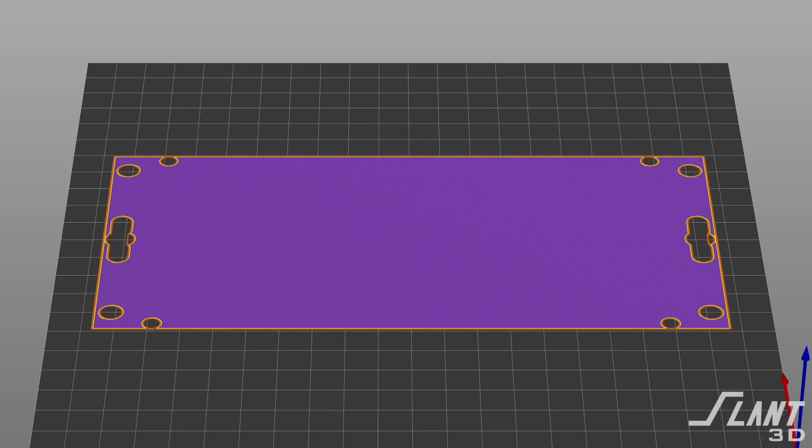Now, very often, those two most common orientations are the way that everybody does it, because if you have a large format machine, you can print it down flat like this, and this creates a good, rigid, reliable part where the layer lines are all horizontal all the way through the piece, and it's solid and it's reliable and it sticks down well to the bed, and that's fine. But if you have a smaller print bed, you might want to print it vertically.

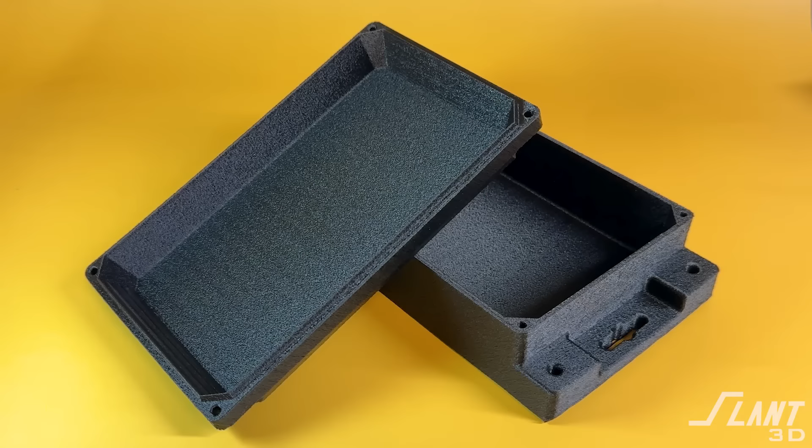But in this case, what you run into when you design a part like this is you end up having support underneath here and support inside of the piece, and that just turns into a lot of post-processing that can really jack with the cost of the part, especially if you are intending to mass produce it, which is what we do around here. So how do you actually design an electrical enclosure like this to not be printed in either one of those directions?

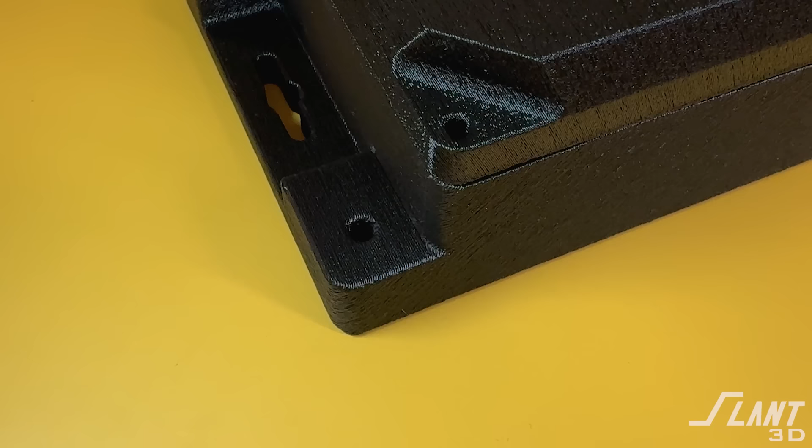Let's just go through the basics of the design of the enclosure itself. First of all, you're using 3D printing, so you can make chunky parts of the part. You can make these flanges on the outer edge really thick so that you can have a good solid screw point to the piece. You can still have all the same features as another enclosure. This part was actually inspired by an existing enclosure that needed to be replicated.

But in order to make sure that you have the same length fasteners, you can make the thinner areas just as you normally would so that you can use the same mounting fasteners that someone had intended originally with the project. From there, you can have thick walls that can either be 2 millimeters kind of minimum up to 5 or 10 millimeters. Again, you don't have to deal with the shrinkage of traditional plastics manufacturing. And since you're not going to be wasting all the material from having to machine something like this, it's just easier. You can get any geometry that you want.

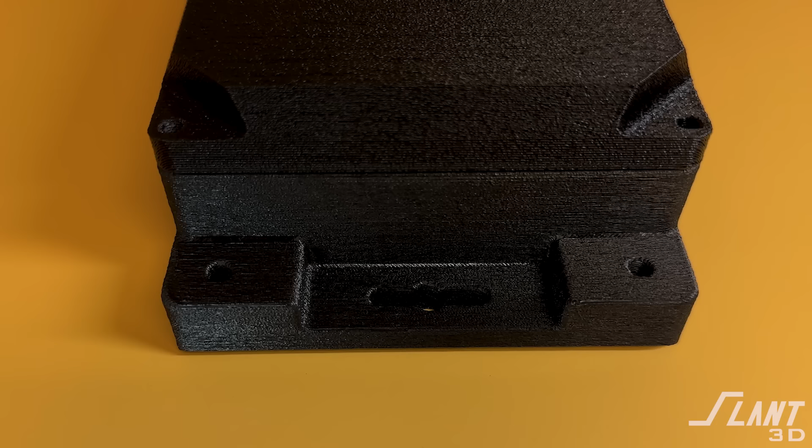And by allowing those thicker features, you're able to create an interface ridge on the top of the part that a lid can interface with. So when you end up with the lid like this, you have this nice thick outer edge that you can then put a lip on the interior of in order to make this mount onto the box more reliably.

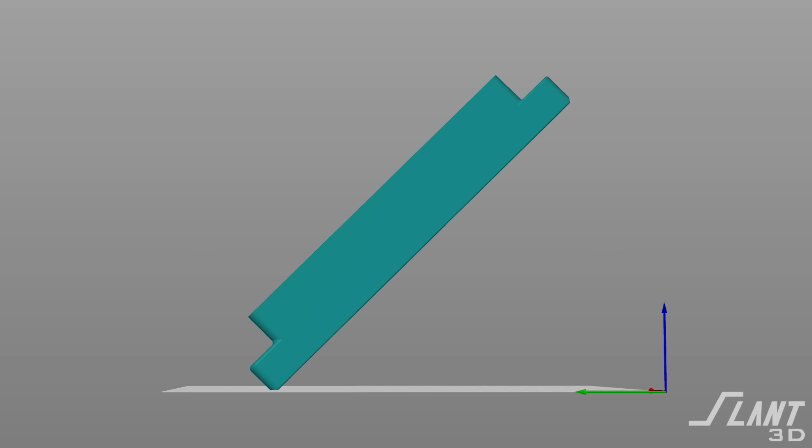But let's go ahead and look at the other way of printing this, because this actually is best done inside of CAD. What you want to do when you're printing a part like this is not actually print it flat or vertical. You want to print it diagonally. Now, this is not very common or very easy to do, because if you print it like this, now the center of mass is not over the center of the touch point on the print bed. So you're going to have the part fall over.

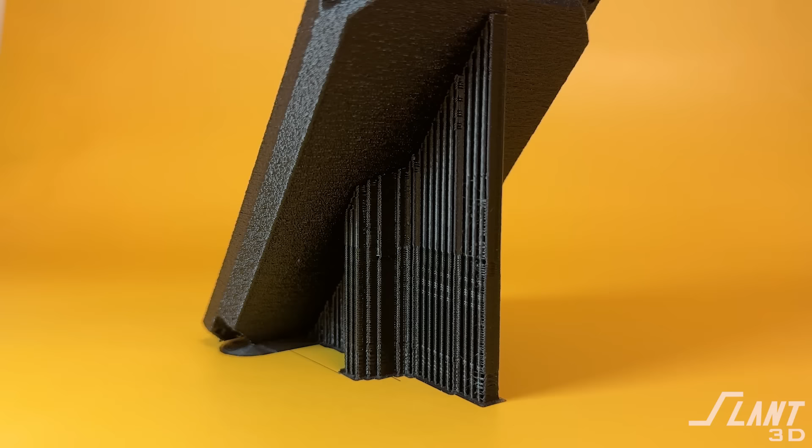So you have to have support back here. But you don't want to have that be auto-generated support because it's just nasty and it ends up creating a lot more material and not always being very reliable. If you're using traditional auto-generated support, it will have a little bit of distance from the part to be removable, so you would end up with flex and wobble as the part is printed. So you have to use designed support. And the way you design this support is just like this.

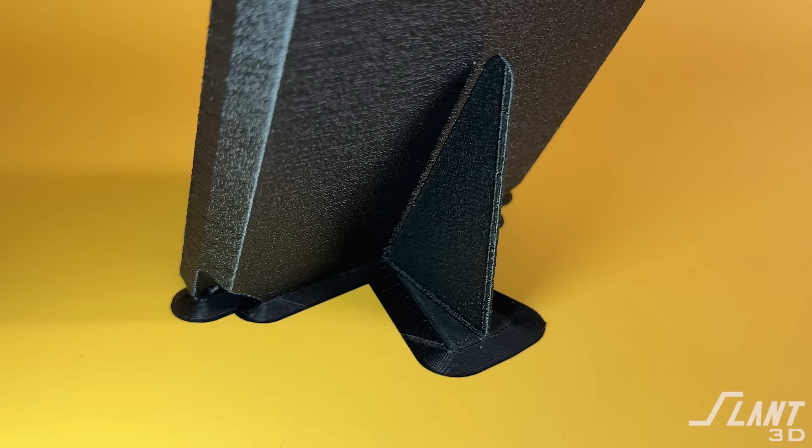You create effectively a fin off the part. You can do it at a 45-degree angle because 45 degrees is the best way to print the part. That way you don't have overhangs that can potentially sag by having a steep area over here, even though it's shallow in the back. From there, you design this fin to be about 0.5 millimeter to 1 millimeter spaced parallel to the back of the enclosure or the part that you're trying to print.

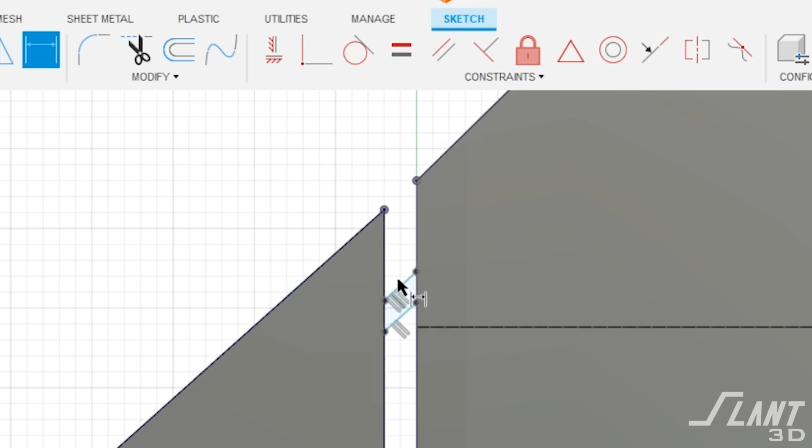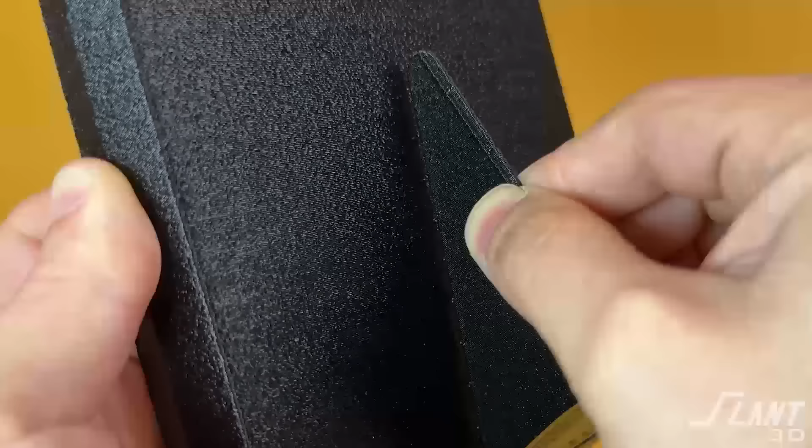Then you take sprues and horizontally design them to run and merge into the part. You now have this nice little set of ribs that run up here along this fin, and you have this awesome piece of support, which when it's done, all you have to do is break it off and it comes clean, and all you have is a few divots that could be sanded down or you can just live with. It's a very clean way of producing supports. It's also very, very reliable.

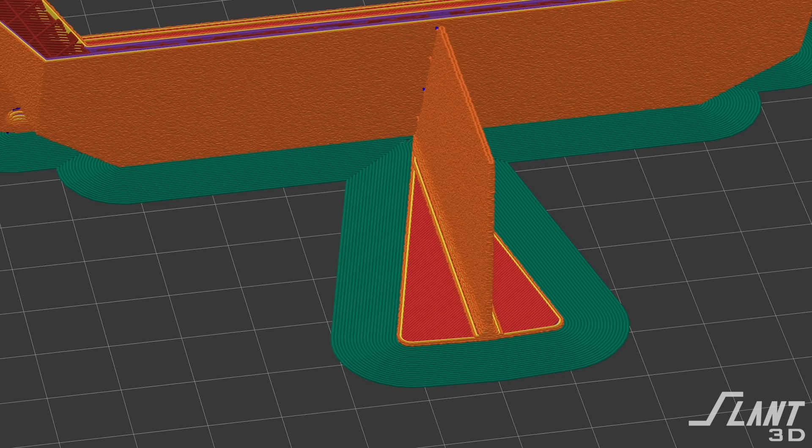And you can actually design these a little bit more so that they break closer to the surface of this part if you want to put just a little bit of a break tooth or a notch inside of them. Once you make that part, make sure that the back edge of the flange is also flattened a little bit so that you have a part of the part against the bed. But now you have this part that was printed diagonally, but is really, really reliable.

The other thing that the diagonal angle does is it allows you to create a really durable part all the way through. If you print it vertically like this, you can have splitting along these lines because that might be a flexural plane. Same thing goes for printing like this. You can have splitting along this direction as somebody installs it or pulls a screw that breaks the layer lines. But by printing diagonally, you have maximum strength through every feature.

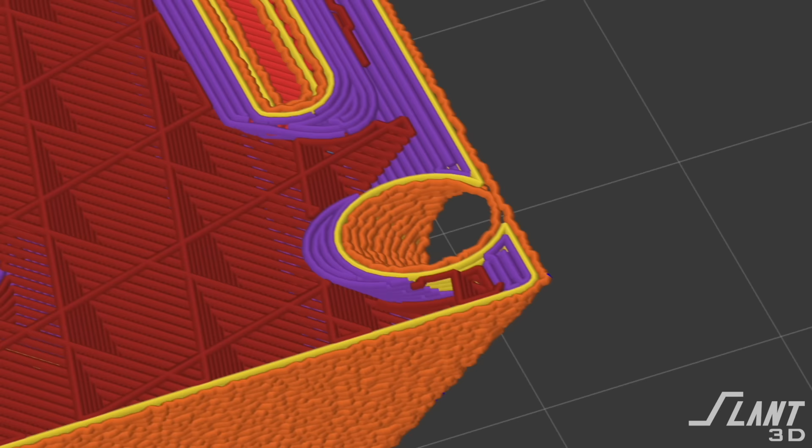So like these holes for mounting the lid onto the top of this, they are actually looped all the way through. So they're not like this where they could split this direction if you put a screw in there too large. They are strong, reliable, and durable. Same thing for the side panels and everywhere else. This is a very good, solid, durable part.

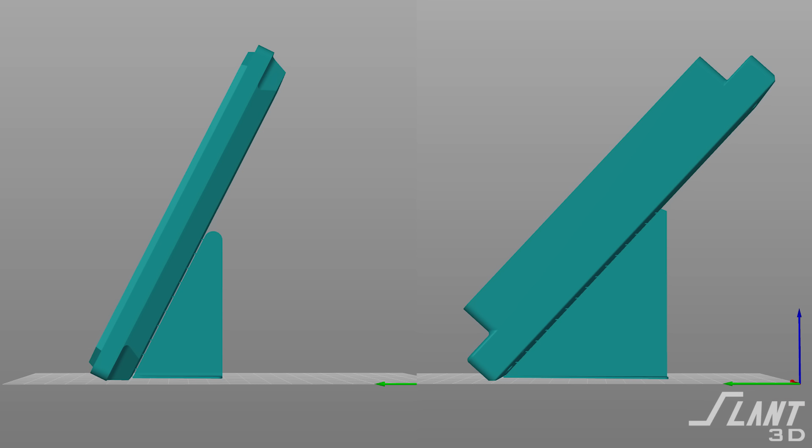Now, the final icing that we did on this was actually to add a little bit of noise to the print so that you end up with this textured surface that just looks really, really beautiful. And then we went ahead and designed the lid, which was then also printed at a similar angle, not quite as steep. We printed this at about a 35-degree angle rather than a 45-degree angle.

But now this part is able to merge into the top of it, and you have a fully complete electrical enclosure that is durable, reliable, looks great, and has a bunch of features that are either thicker or stronger than what traditional manufacturing would generally allow while still being affordable.

This type of enclosure you can produce thousands of and do it as affordably as traditional enclosures out there, but you're getting a custom box with features that you need, and you are able to get a style, a look, and a durability and capabilities that you can't get from some off-the-shelf solution that would probably be similar cost at large volumes.